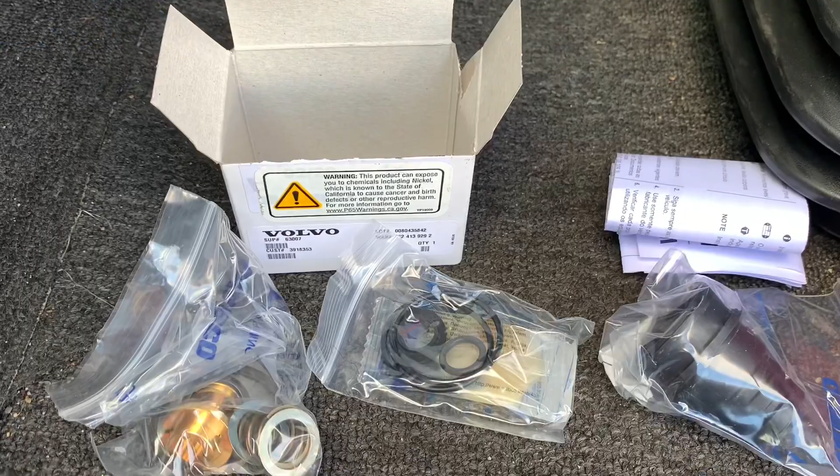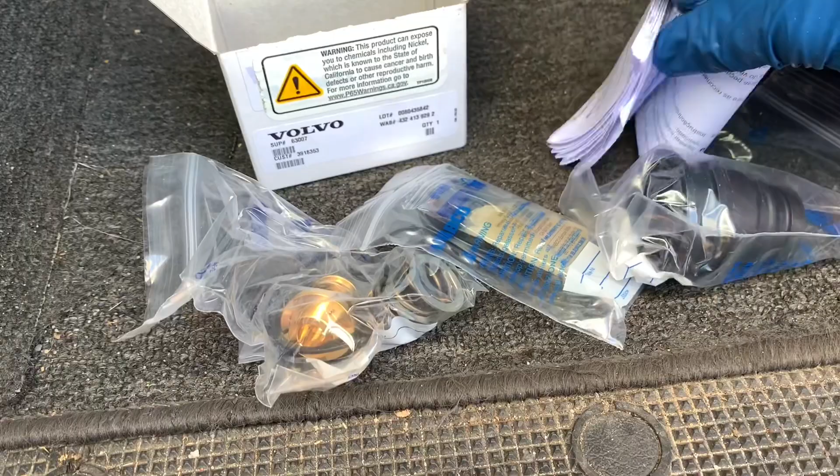So when you open up the box, you have your parts in there. You have the exterior enclosure, and you have your internals that we're going to put together. We have the O-rings and some lube for them - and then in here there's like 18 different languages of how you can put this together, so that's for everybody. Here's everything opened up. Like I said, we have our schematic here. This is going to be the exterior enclosure, and we're going to put this together right now.

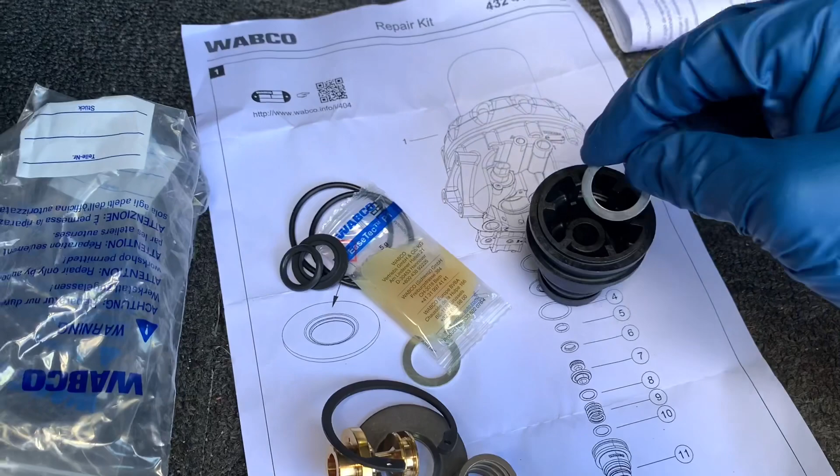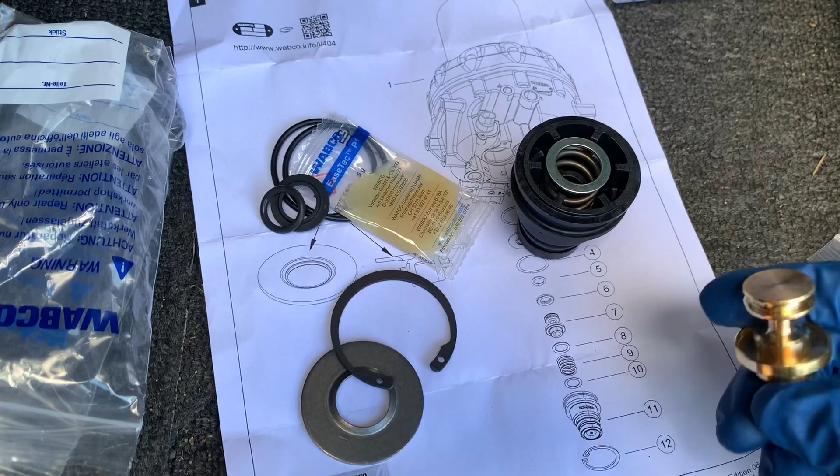I've done this quite a few times before, so I already know how everything works. The O-ring is going to go down here at the bottom - that one's going in there, it fits there, so that's going to be number 10. Then we're going to put our spring in for number 9. Number 8 is going to be another O-ring, which goes right on top of here. Then we're going to mess with this section, which is this piece here. It goes this way - we have on this side this little O-ring that looks like this, and it actually goes around here.

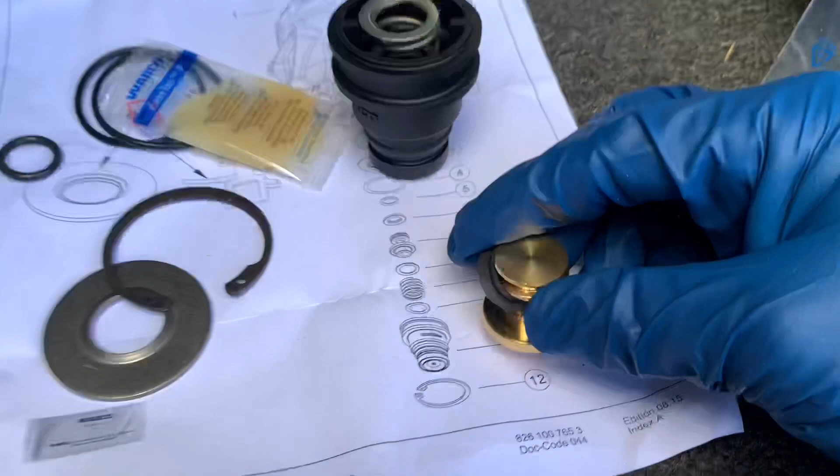Trying to do this one-handed, of course - my tripod is in the truck anyway. All right, there you go, we got it. Did we get it? There we go, we got that. And that's going to go down here into the bottom, and it actually sits into this groove here. As you can see, there's a groove there - give me a second, we push this in there, and it sits in that groove.

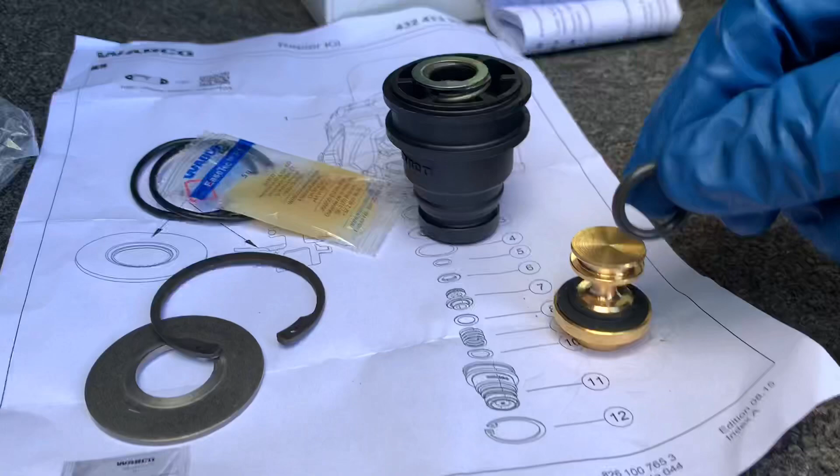There you go, so that is in there. Next, you're gonna have this O-ring here. This actually goes on this piece here, right in this groove. We're gonna save that for a little bit later because I have to put lube on it, and I don't wanna get my gloves all dirty while I'm still trying to film this.

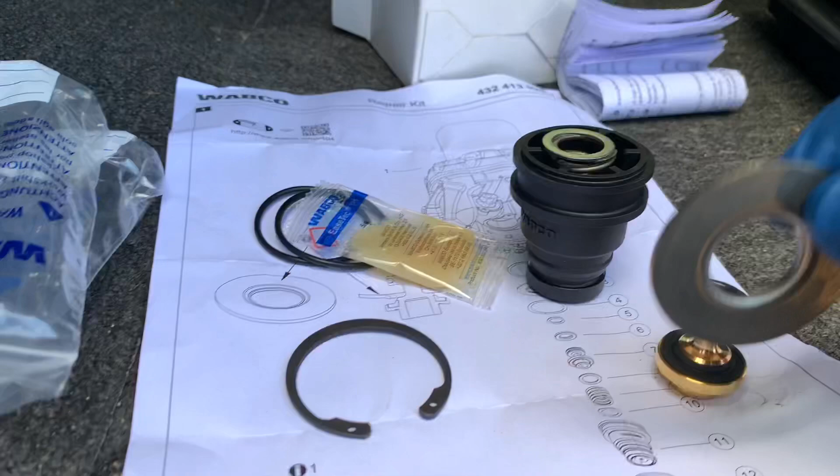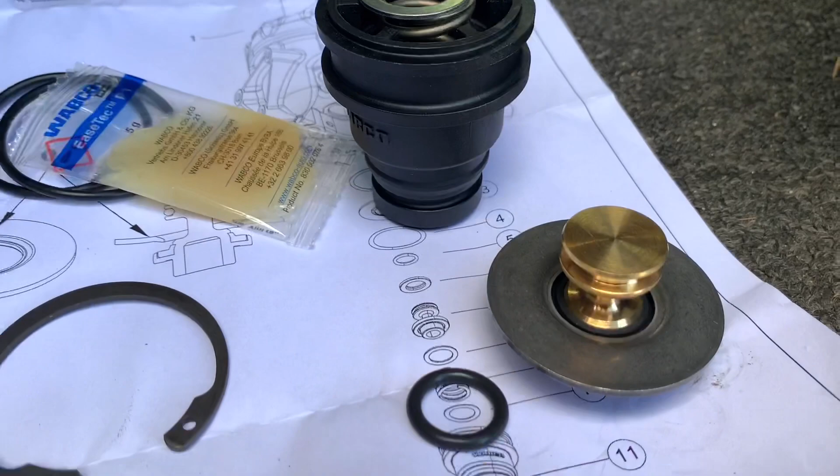But basically what happens next after that would be this piece here. You're gonna have this ring. This here is actually going to go over this. So let me take this out, and that's gonna go over this just like this and sit right in there. So after we get this piece on here, we get our O-ring on.

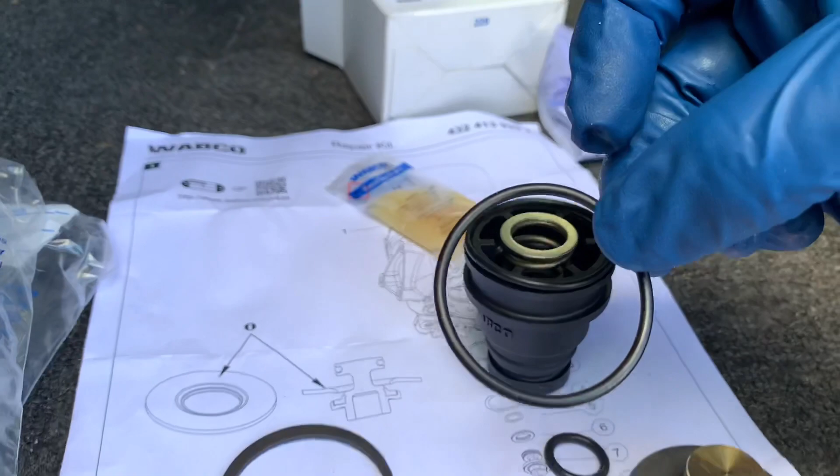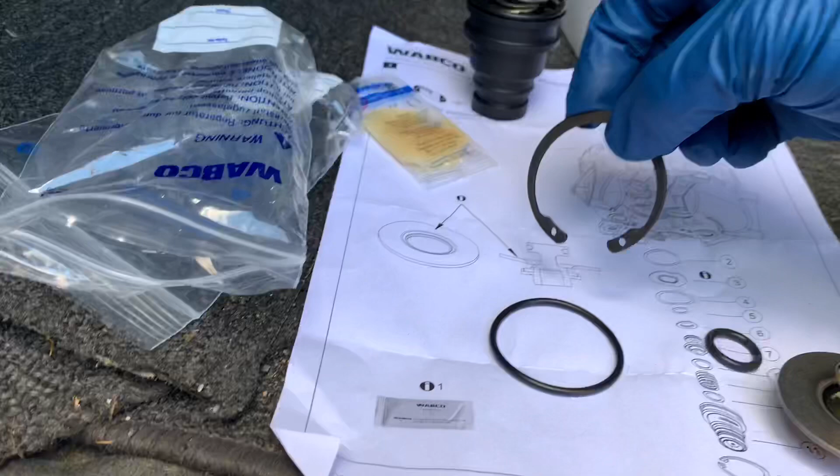We're gonna have 2 more O-rings. One is going to go right here on the top, and then this other one is going to go up inside the actual area where the purge valve will go, which is going to be this section right here. Anyways, that's how you put it together. This, of course, is the ring that will hold it in from the outside. So let's go under the truck and start getting this all together, and I'll see you guys in a second.

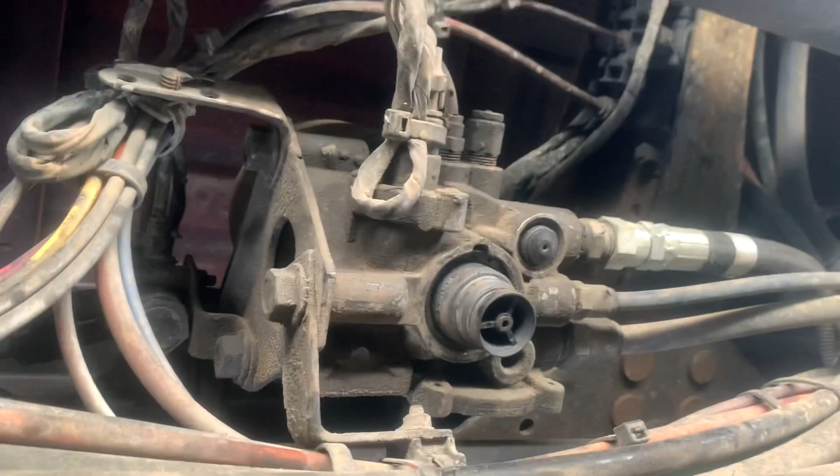All right, guys, so we are under the truck now, and this is the actual unit here. This is gonna be the air dryer. You can see the filter there up on top of it, and we're directly under the driver's side of the truck. This right here is the purge valve. Sorry, my gloves aren't really super tight. But this is the purge valve here, and this is the ring there that's on the inside.

Cotter ring, I don't really know what you'd want to call that by name. Somebody can put that in the comments, I guess. But right now we're gonna go ahead, we're gonna get that ring off, then this will pull out. For this, I'm using a flathead screwdriver, and where's the other one? Here it is. This is our little pincher tool here.

I will not use this tool to get it out, because getting it out is actually super, super easy. It's nothing more than just putting this screwdriver in there and then prying this off, and it will come out. Usually I use 2 hands because it's gonna snap. Oh, cool. That comes off there, and then boom, there's everything there.

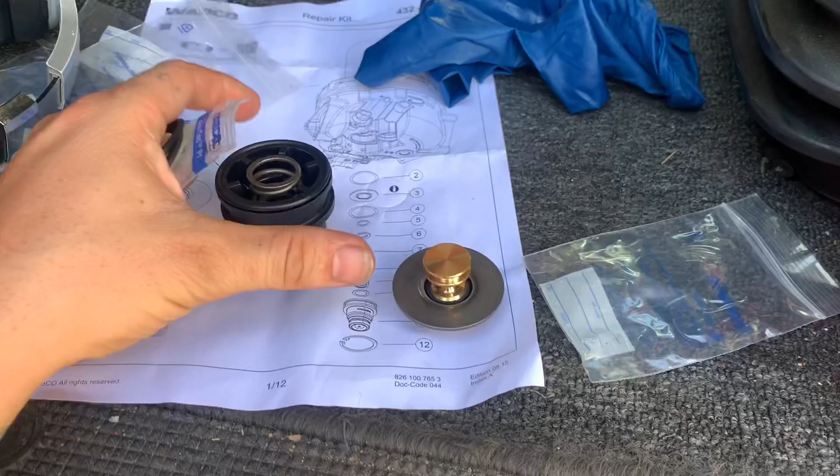So we're back up top. I took off my gloves because I had to make a phone call. I'm not gonna bother putting on a new pair and wasting them. We'll just wash our hands. Let's grab all of our parts here. Let's head down to the bottom and we get this stuff going. So I have no idea how the video is gonna come out, but we're gonna go ahead, hit record, get started, and whatever comes out, we will put that in the video.

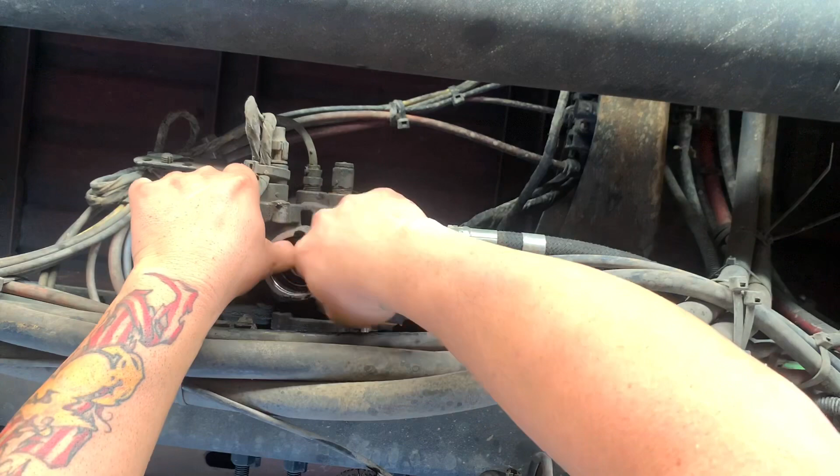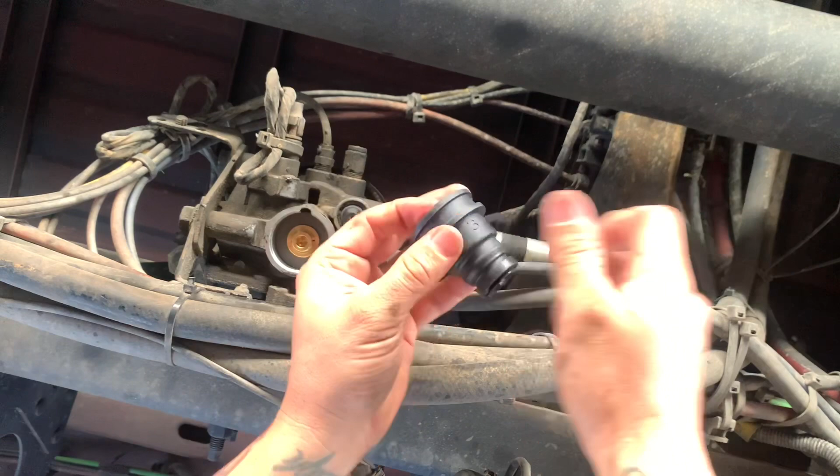All right, next we have our washer that's already inside the housing. We're gonna put our spring in there. We're gonna put our other washer on top of it. Then last but not least, we're gonna put our last O-ring around the top of our housing. Get the O-ring all lubed up, and we're all set to go in.

And when you're putting this on there, that spring will compress, so you'll wanna push it in. And most of the time, I try and wedge it within the groove there, and that groove is where this ring is gonna sit. So I'll wedge it into the groove first, so it'll stay there, because if it's not in, it'll just fall back out. So wedge it into the groove. Let's go ahead and get our little pliers here on.

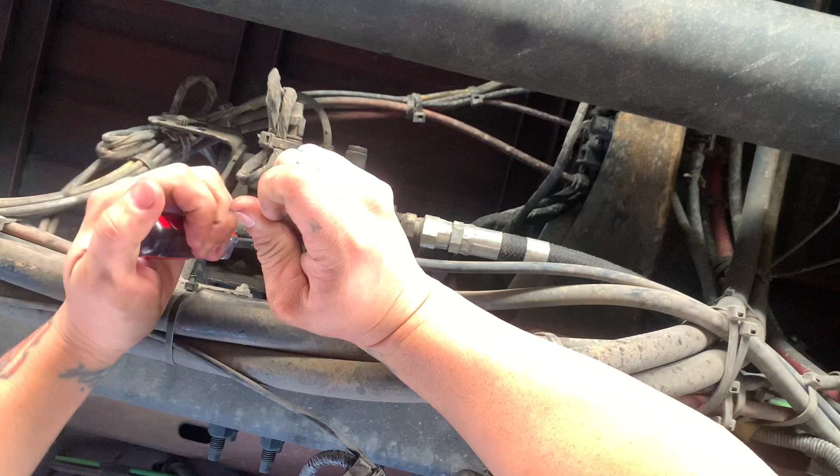All right, so we've got our ring in. Of course, it's not 100% set just yet. We're gonna go ahead and tap that, get this set into place. Here we go, so it's gonna spread out. See, there, and on this back side. And we are now all in there. So now our ring is on here. What we're gonna be looking for is this little gap here. Let me get this to, there you go.

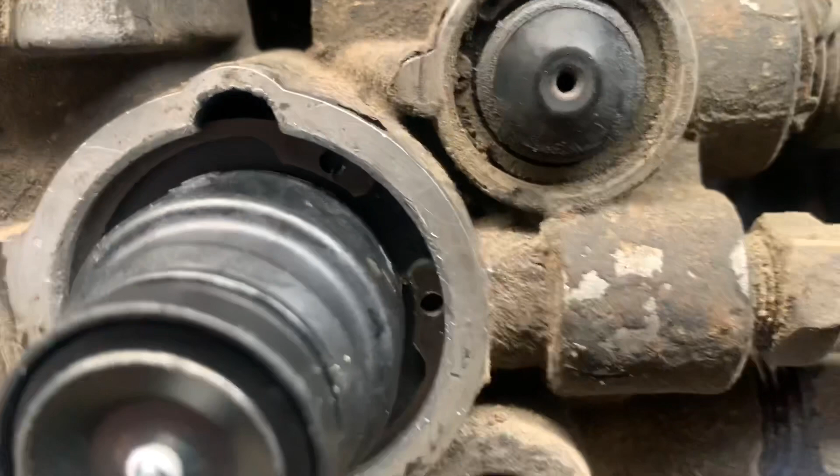So you see it's not touching the center part of the housing as well as there. And then the ring goes around, and even in the back, it's not touching the center part of the housing. That means that it's all locked into the groove there. Because inside here, as you can see, sort of, there's a groove in there where that ring actually sits to lock that in place. But anyways, we now have that on there. It's going to work perfect.

We're gonna go ahead, clean everything up, go start the truck, let it build air, and then I'll show you guys what it looks like afterwards. All right guys, so we just gave it our quick dry start. Aired it almost all the way up to 120. I went ahead and cut it off. It's holding air pretty well. As you can tell, we have no sound of air leaking.

So am I gonna say that it's fixed? Definitely not. I probably need to get the air dryer replaced as well as a few other things. But for right now, it's gonna get us back on the road. It's a quick, easy fix. The part cost usually around $45 to $50. This place charged me 65 bucks, which is a lot more than what I'm used to paying for something like this. But anyways, I've got the old spare stuff down here on the floor.

We're gonna go ahead and get that cleaned up, wash the hands off because now we're all dirty, and then I will be getting out of here. So I will see you guys a little bit later.

Hey guys, so it's later at night. I'm about 25, maybe 30 minutes away from my drop off in Tampa. Of course, because it's later at night, I'm not able to do it today, or else I definitely would to get it out of the way. But we drove the rest of the way down here. We haven't had any issues with the purge valve. Everything's been working really great and should work great for quite a while. So hopefully I don't have to make another video like this for a few months.